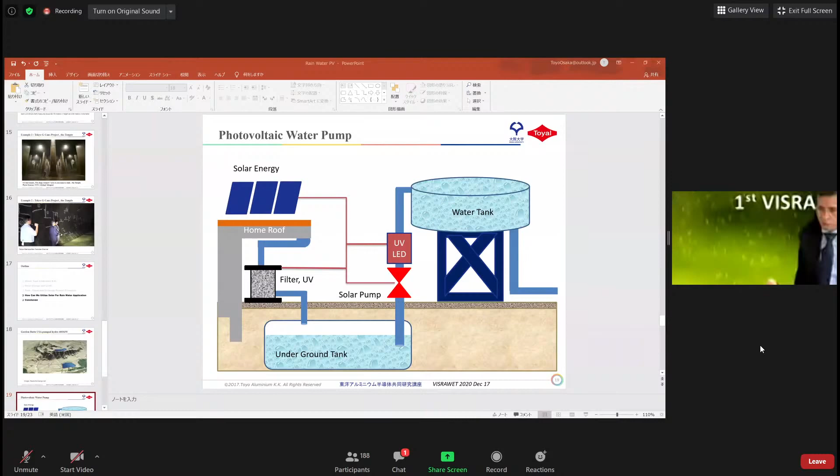Graduated from Sana'a University with a bachelor's degree in physics, and a master's and doctorate degree in engineering from Tokyo University of Agriculture and Technology. Professor Dr. Marwan also was involved as a Japan Society for the Promotion of Science Fellow and worked at Tokyo University of Agriculture and Technology until 2010.

In 2011, he joined Toyo Aluminium as a manager of the solar laboratory, director for technologies. He has been appointed as professor at Osaka University and become senior specialist executive at Toyo Aluminium. He has been granted 15 patents, 35 applications, and over 150 publications referred in journals and international conferences.

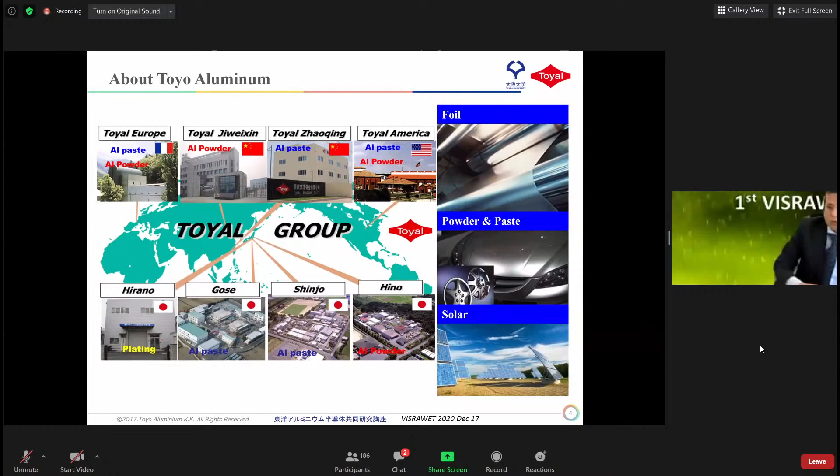So to start with the solar industry, of course the solar cell, or the solar energy device which transfers sunlight into electricity, was invented back in the 50s in the US. However, the price of electricity generated from these solar cells was extremely expensive. It was like $100 per watt, which means a small solar cell that can produce 5 watts could cost around $500.

However, because of advancement in technology and advancement in production, we could reach down to now about 20 cents per watt, which means that a solar cell that was costing us about $500 is no more than $1 today. So that makes solar energy one of the cheapest energies in the world.

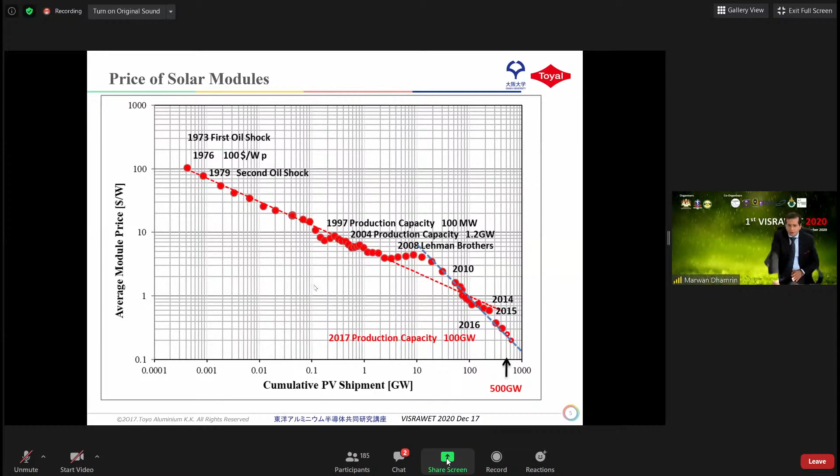If you compare gas, nuclear, and coal—which by the way Malaysia is depending a lot on—the megawatt hour price is above $65 per megawatt. While with solar, wind, and geothermal, we can go down with solar to about 30, half of that. So now it's more economical than ever.

And the reason is the big expansion in production capacity in China, reaching around 150 gigawatts of module production capacity. So to follow up with the prices being offered in terms of electricity...

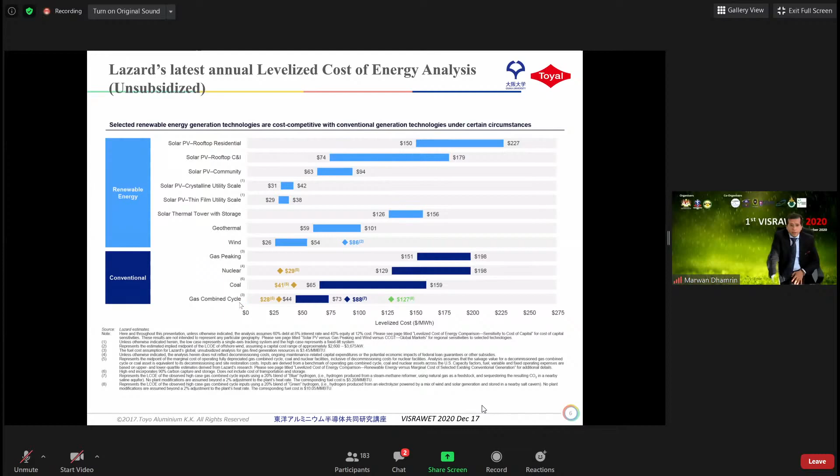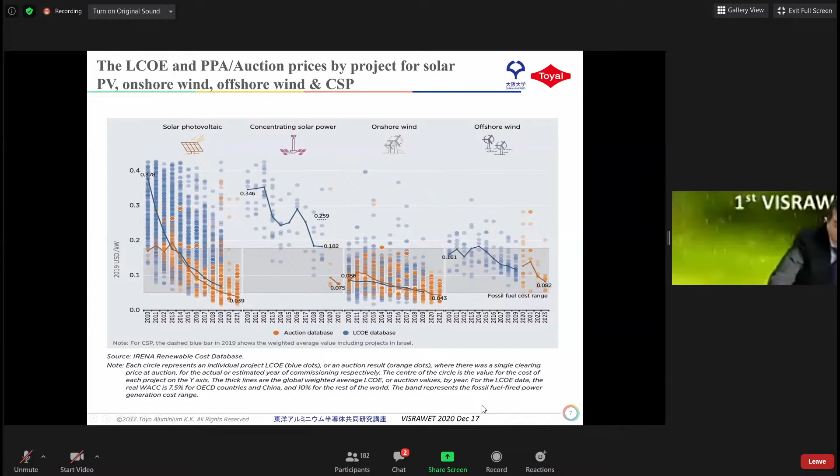You could see here that solar photovoltaic projects, compared to wind and offshore wind, are reaching really, let's say, 3.9 cents per kilowatt hour in the vicinity of 2020, with some exceptions in some areas, reaching around $15.6 per megawatt hour, which means about 1.5 cents per kilowatt hour.

I suppose that in Malaysia, the price of electricity is far higher than this. So the message now is that the solar industry, or solar energy, is really one of the competitive energies in the world right now.

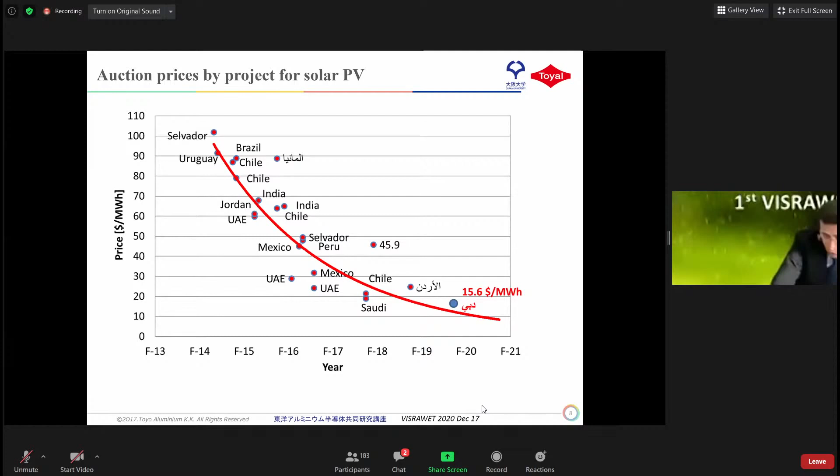So what about Malaysia? Malaysia is slowly moving towards the solar industry. In terms of solar installation, Malaysia is still far behind other countries like, let's say, China, Japan, Europe, Germany, and USA—still far from there.

The reason is not clear to me, because Malaysia has geographically a very good potential. I show here a map of Malaysia from this website that shows there is massive solar irradiance across the whole country, which can make solar energy far more economical in the region.

Another aspect is that at least 4 of the big solar module manufacturers in the world have companies and factories in Malaysia. To mention, Hanwha Q Cells, a giant Korean manufacturer, has their factory, which I visit frequently, in Cyberjaya near Kuala Lumpur - a very state-of-the-art factory. Another US company, First Solar, also has factories in Malaysia. Sunpower, another US company, and Chinese giant Jinko has a big factory in Penang. There are also other small companies not mentioned here.

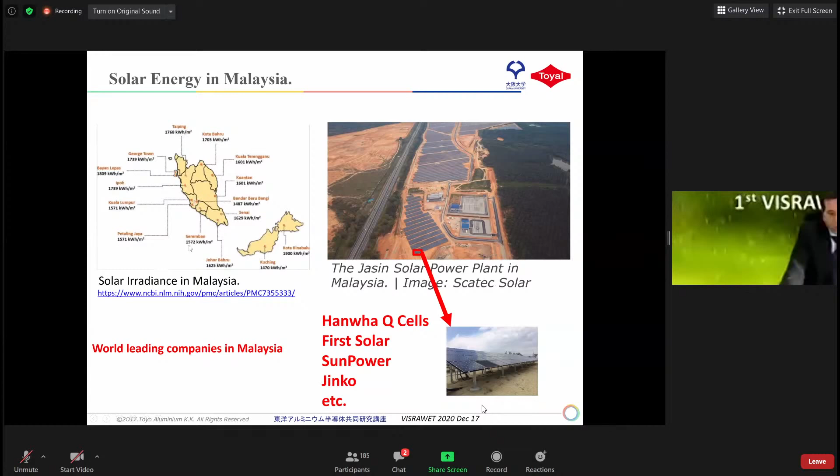If you could see this, it will look like this photo - I will make it bigger. Solar, by its way, is a very good harvesting system. The solar module itself is made of glass in the front, so raindrops can drop onto this beautiful glass surface, and then you could collect the water and use it. So solar by itself can generate electricity, and when it rains, it has a very good surface for collecting water.

For example, Japan can install about 8 to 10 gigawatts of solar modules yearly. Each gigawatt consists of at least 4 million panels, each panel around 1.5 to 2 meters square in area, which means you can install solar in big farms with millions of square meters, and at the same time use those surfaces to harvest rainwater easily. This is one of the ideas I'm thinking about.

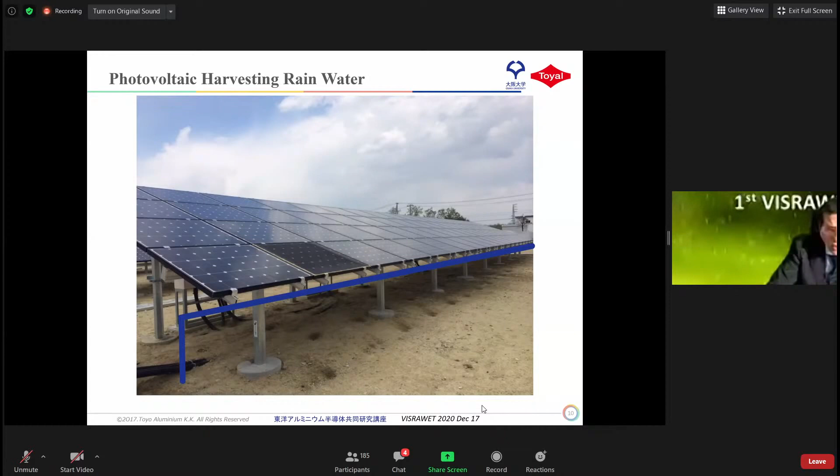Back to the main topic, which is rain and clouds, let me show an example: this is the Hong Kong West Drainage Tunnel. Because rain accumulates and then floods the city, they made a big tunnel that can drain and discharge the water.

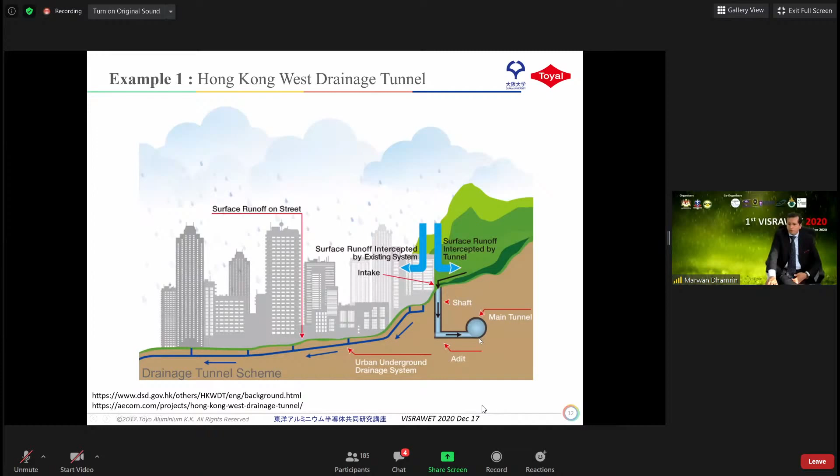This flooding was a big problem in Hong Kong, and they solved it with this kind of tunnel that collects the water in a reservoir and then pumps it later into the sea. But pumping it into the sea means a bit of waste - we could have used that water for other purposes, as my previous speakers already showed.

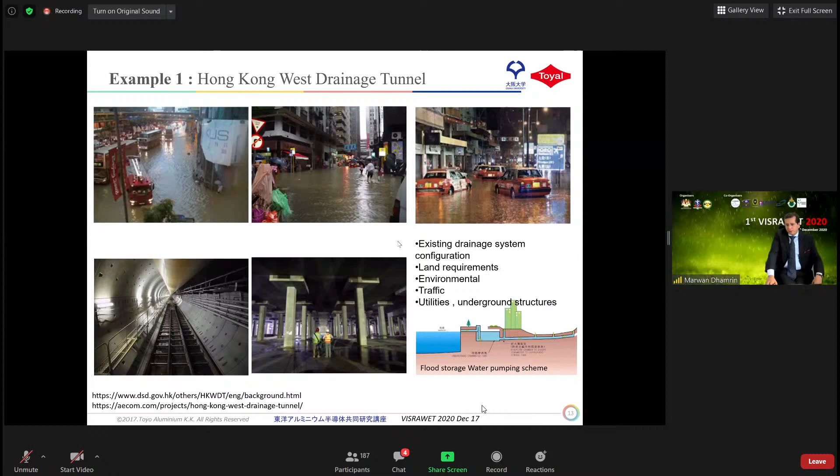Another example is the G-Cans project in Tokyo, or the temple, which consists of 5 big shafts. Imagine this shaft - you could fit a huge space rocket inside it. It's really giant, 65 to 70 meters tall with a 30 meter diameter. These shafts collect the water inside and then channel it to what they call the temple, which is really huge - this is one of the photos showing the inside.

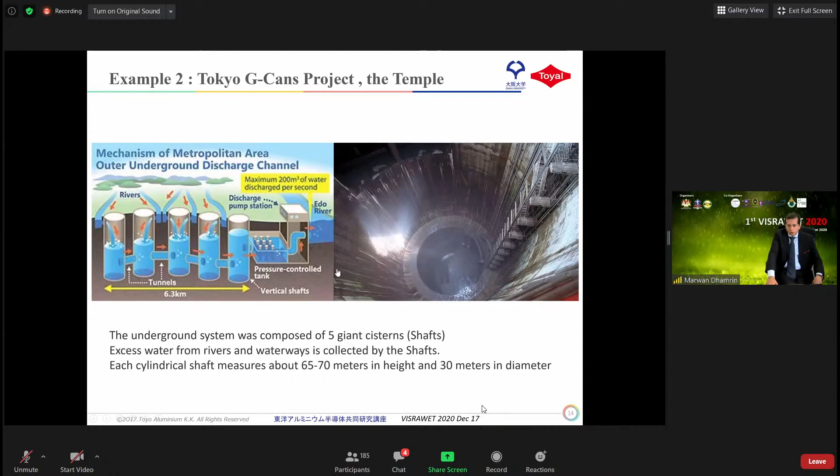And if I may ask Engineer Mohammed Sarah to share this video from his side - could you share the video, please?

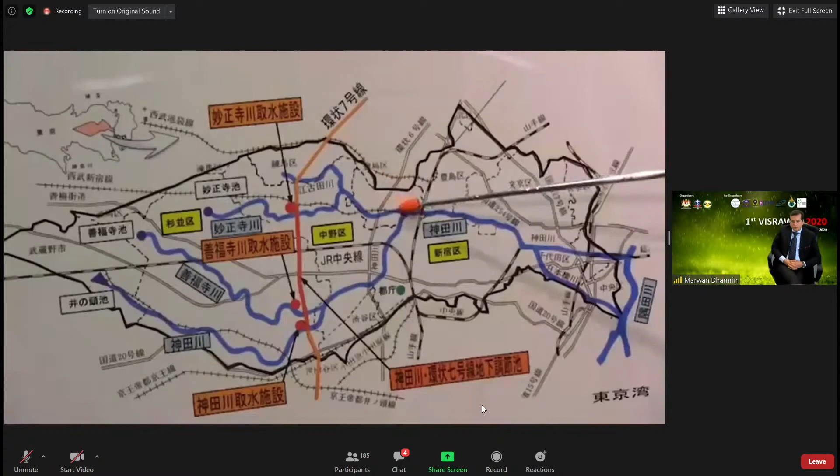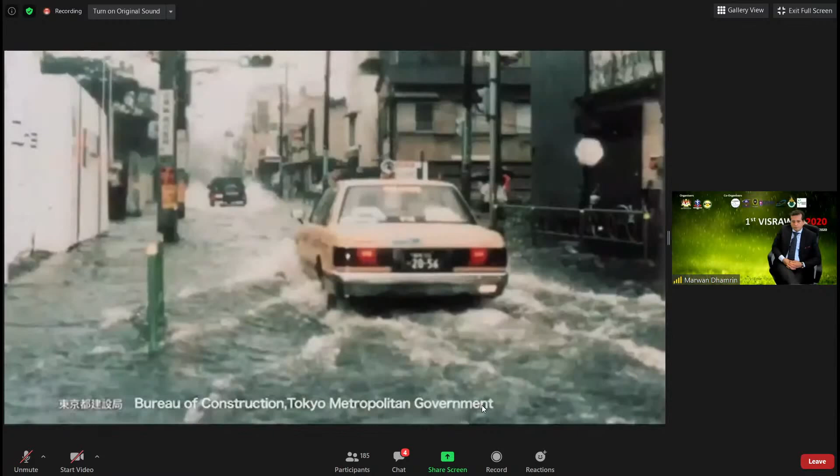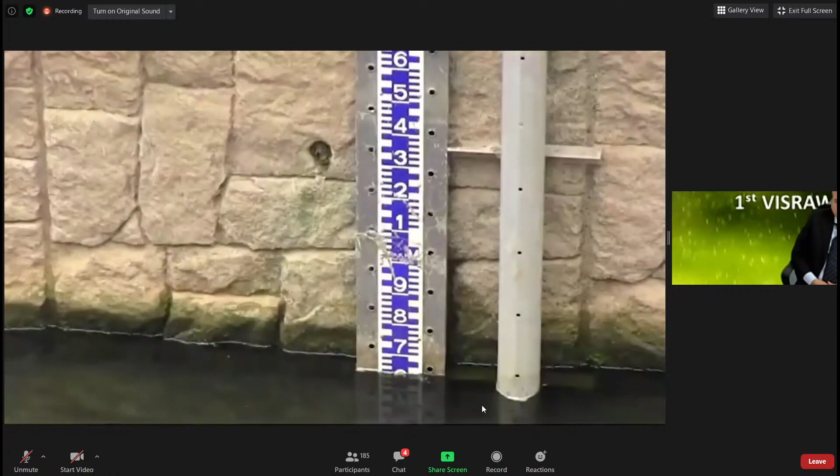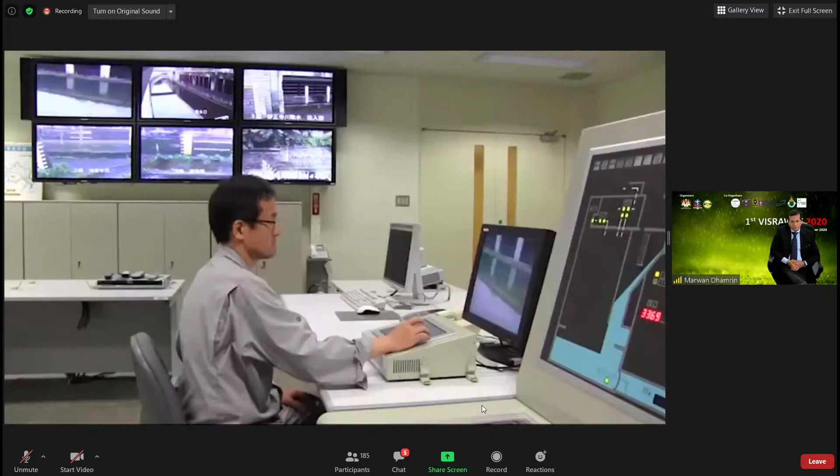Japan is located in the eastern end of the monsoon Asia. Tokyo has an annual average rainfall of 1,700 millimeters, about twice the global average, concentrated in the rainy season and typhoon season from June to September. In the past, riverbanks and sewers in Tokyo would often overflow during typhoons or rainstorms in this season, causing flooding that affected roads and homes. As urbanization in Tokyo progressed dramatically, the Tokyo metropolitan government put efforts into developing advanced disaster prevention. One of the principal projects was the development of underground regulating reservoirs and diversion channels to help prevent this flooding.

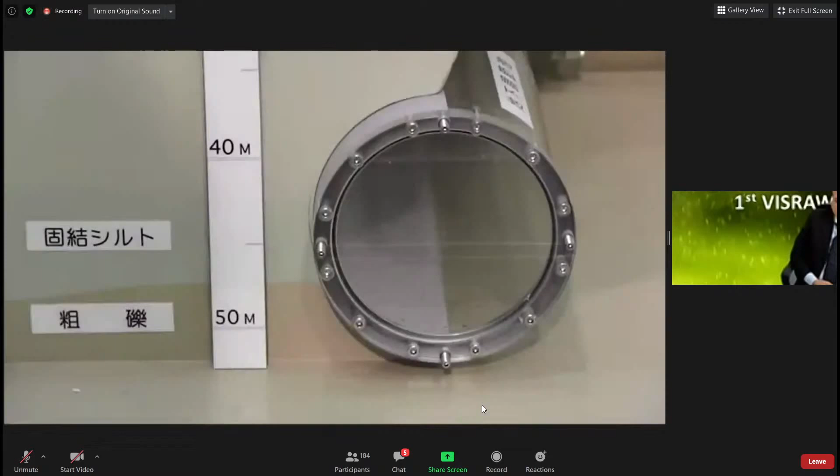This is the Kanda River Underground Regulating Reservoir - one huge tunnel built under the major road, completed in 2007. The diversion tunnel temporarily stores excess water from the river channel, which has been a big problem causing floods to thousands of homes during powerful rainfalls.

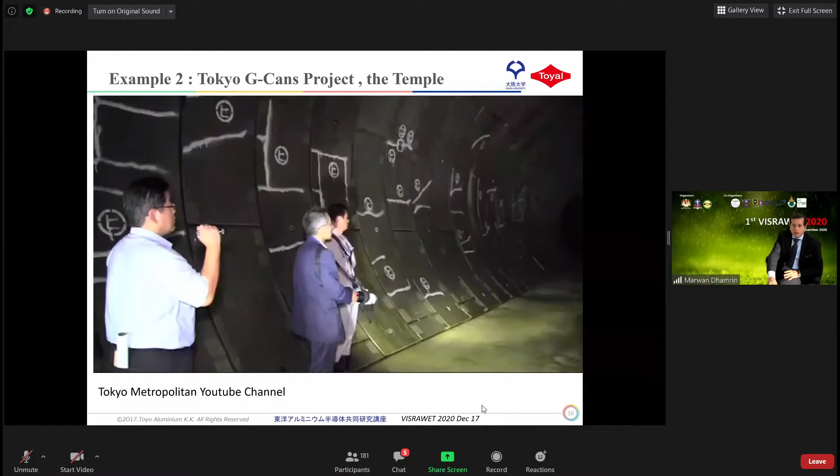I would move to the next thing now, which is how we can utilize solar and other applications.

I'm still there, can you hear me? Yes doctor, yes doctor, loud and clear.

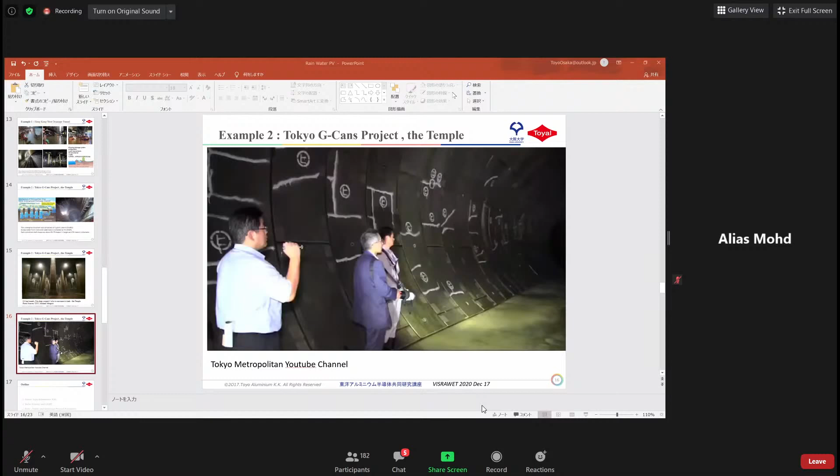Sorry, can you hear me? Yes, we can, doctor. Okay, so I'll continue.

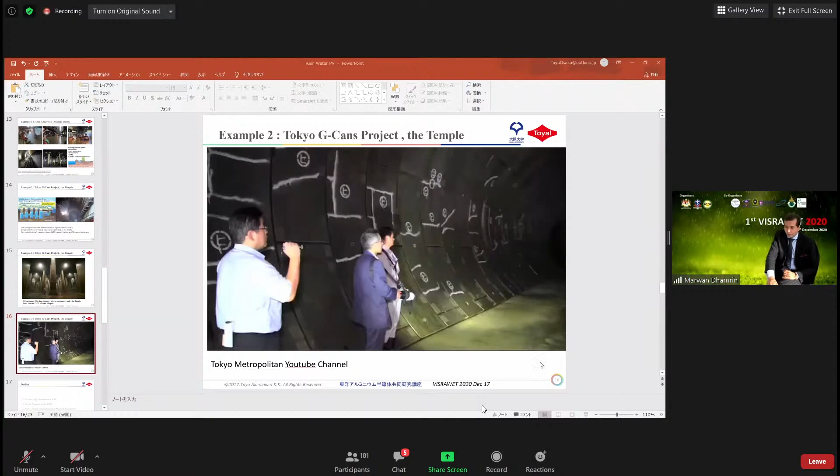So the biggest question is how we can use or utilize solar for rainwater applications. I will give you an example here.

It's a project in Gordon Butte in the USA, using a pumped hydro of 400 megawatts. What they are actually doing is a kind of artificial dam, or instead of a dam, big tanks. They make a big reservoir of water tank at height that they could pump water into from down below using low-cost electricity, for example solar in the daytime, and then when the reservoir is filled, they can use this water as a battery. So when it drops down to the lower tank, it can generate electricity.

So we can use water as a very good battery if we have a geographical feature that can help us, and also low-cost electricity like solar to pump the water up during the day and then use it as a battery at another time when needed. It's one option that's in the momentum right now, because with solar it can be cheaper to pump the water up during the daytime, and during the night we can use it, because we cannot get solar energy at night since there is no sun. So this is one example.

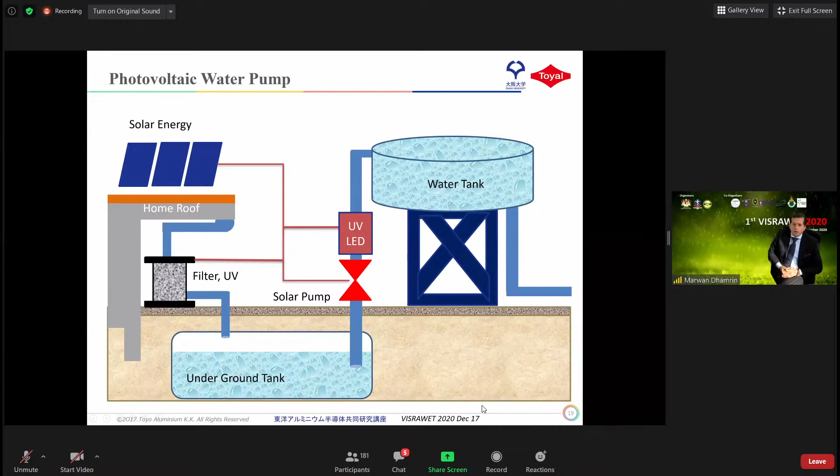So once we have this water tank, I would like to introduce you to another system which we at Toyo Aluminium are now developing. We are developing a kit tool that really measures the moisture - a moisture sensor with very good reliability and high detection quality. With these sensors, we could monitor the moisture in the ground or in the soil.

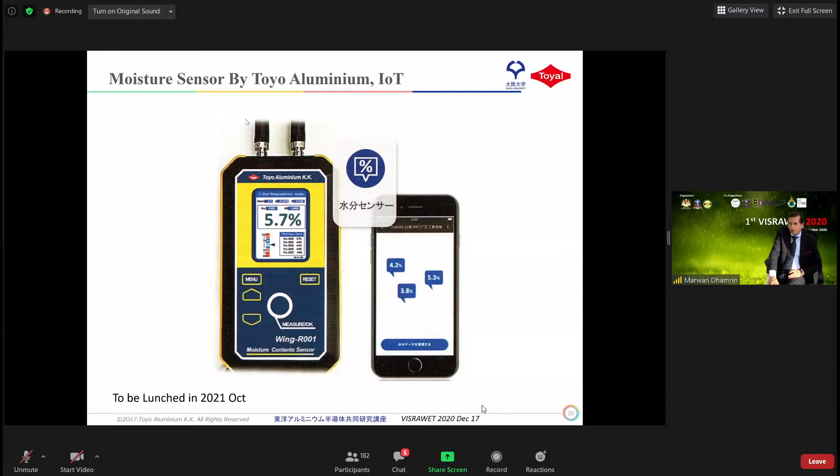So how can we use that system in a smart irrigation system? We can use small solar panels, not necessarily big, just enough to operate these sensors. The system will contain a sensor, a control unit, and a small battery, so this can work 24 hours, connected via Wi-Fi or wireless communication, even 4G, 5G, Bluetooth, whatever you need as communication inside the device - it's cheap electronics nowadays.

So the process will go as follows: the sensor detects moisture in the soil and reports to the control unit. If this goes below, for example, 20%, then automatically an electrical valve will open and the water can go out. When moisture is enough, for example 80% in the soil, then we just close it off.

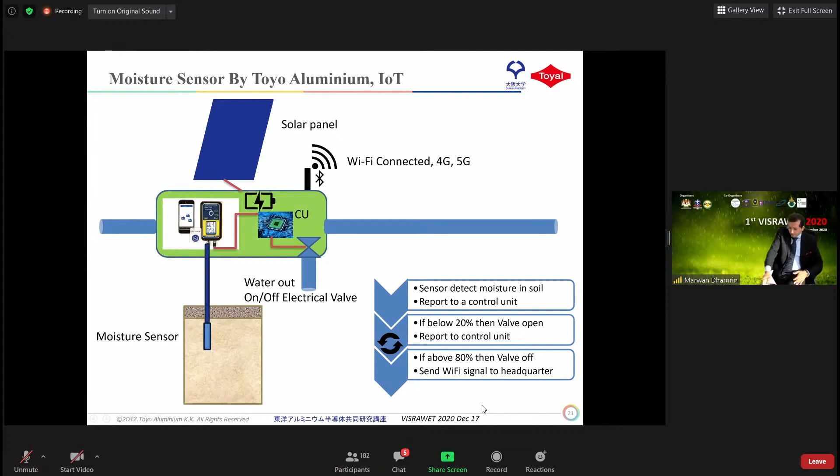So small kits like this can really make use of water, so that you can use it as an irrigation system, and you can place it in separate locations across your field, and use that to smartly use the water without any loss or waste.

So why do we use these systems? We could use automatic timing, like open at 5 o'clock, close at 8 o'clock, or something like that - yes, we can use that. But of course, there are some days with a lot of rain, so why would we waste that water? With this system, it measures and tells us when we need water, and it's connected so that at a headquarters, you can know when all your field or all your area needs water, and you can control the amount of water that goes to the ground.

So with that, I would like to conclude that photovoltaic energy, like solar energy, is becoming really affordable and very low cost. We can use it for helping harvest water, and also to make smart technology to make the best use of our water.

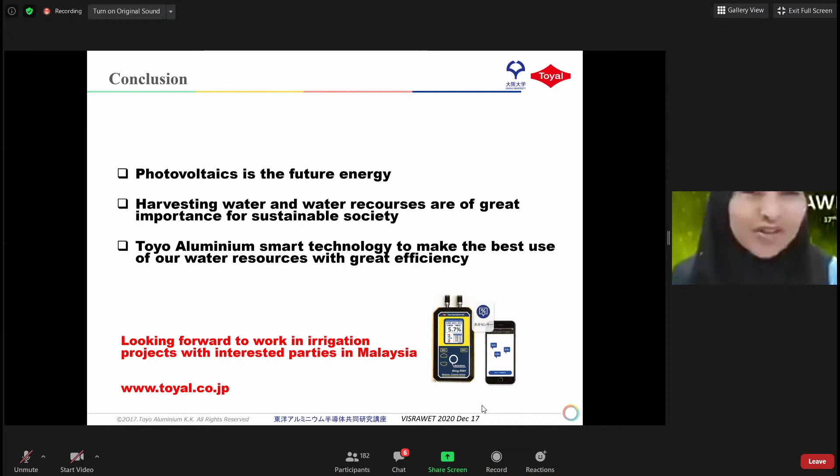Thank you, Professor Dr. Marwan, for your elaborations on the rainwater photovoltaic applications. We are all very honored to have you here to share all the knowledge and the high-tech technology that you have created.